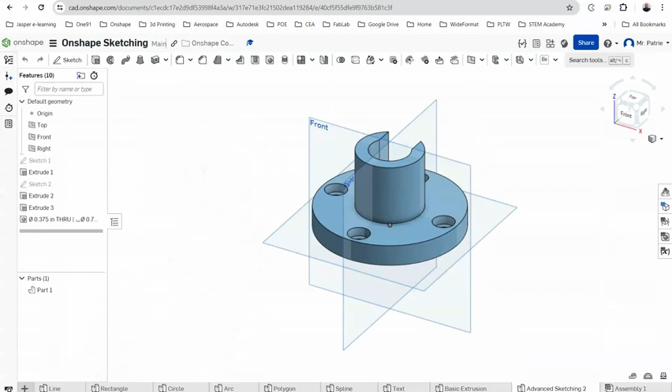We'll go to Onshape. You can open the Onshape assignment for advanced sketching. I'm going to create a new part studio and rename it advanced sketching. I'm going to do a new sketch and put it on the front plane.

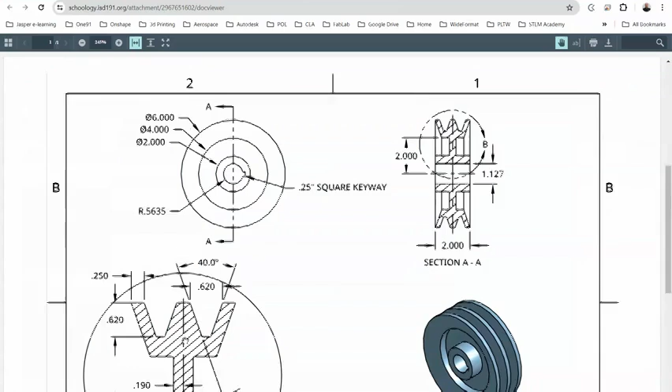Now the first thing I want to do is get this set up, because we're going to be drawing a profile and then revolving it around. So I do need the diameters in there.

The first diameter, they're telling us we're basically going to draw this line here first, and that line is where this hole is at. It's telling us right here that hole is 1.127. So the first thing we're going to do is go into Onshape.

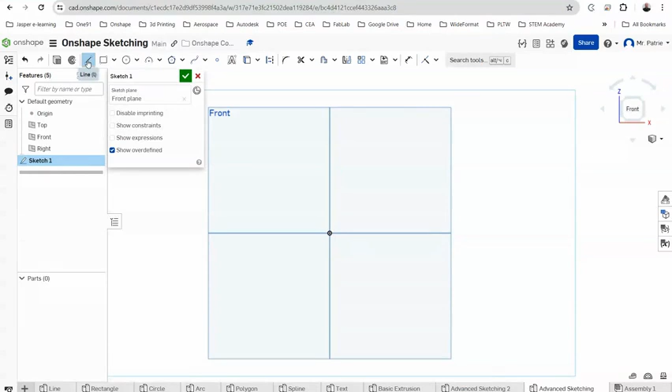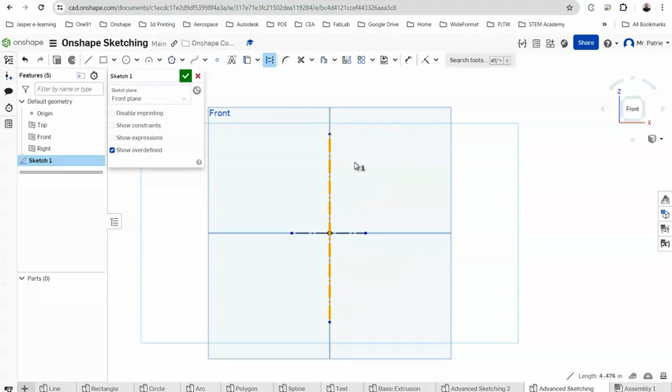I'm going to make a line, make it a construction line, and draw it in here. I'm also going to draw a construction line here as well. If it doesn't draw it, you can click on it and type Q and it will make it a construction line. I'm now going to draw a regular line.

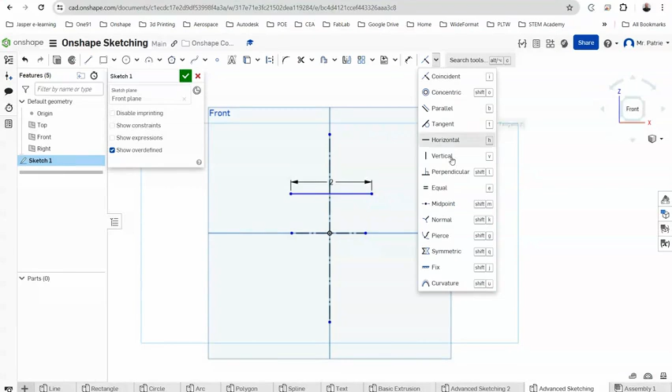This regular line is going to be 2 inches long. So I'm going to draw a line and make it 2. I do want it centered, so I'll go up to my constraints and do symmetric. I'll choose my 2 endpoints, then choose my line, and that'll make it symmetric.

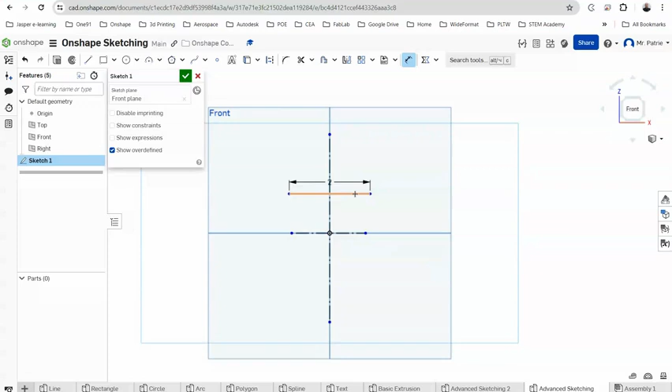Now I want this line, which is the same as this line here, to be 1.127 diameter. So I'm going to take a dimension from here to the center line, and pull this out. You can see it's giving me a diameter here. You can also do it this way, but we want it as diameter, and we're going to do 1.127. I double check to make sure - yep, 1.127. So that gives us the bottom.

Now I'm pretty much just going to focus on drawing this here, and then we'll double check to make sure that it's 6 inches in diameter to the top. It should be once we get all the correct dimensions in, but I might go do that right now just so that we have it.

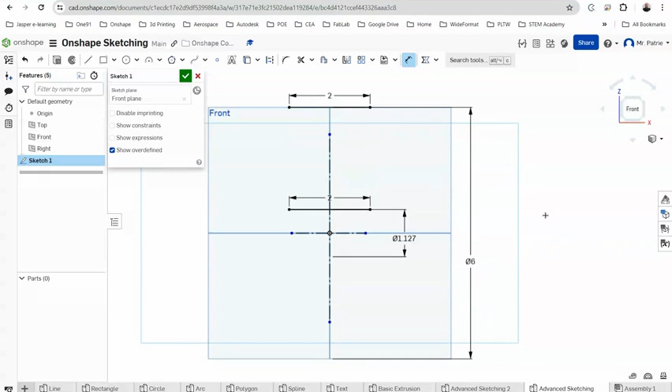We'll put another line in here, make it 2, make it symmetric. Then we will dimension from there to there, and make this one 6. I do want to make this line now longer. So that's the top, that's the top up here, that's the bottom.

So we're at 0.4365 right here. I'm going to take a line, start here, go there - 0.4365, I think is what I said.

Yep. And then this one here doesn't tell us this length, but it does tell us it's 0.190 from there. So all we're going to do is draw this in here. We're not going to put a dimension in, but then we're going to dimension from here to that, and that's going to be 0.190, I think. Yep.

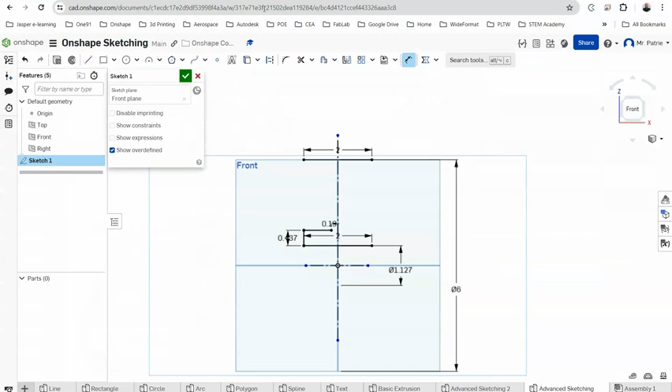This one here, it doesn't tell us this height, but we know that to there is 4. So I'm going to draw this line straight up. Not going to put a dimension in, but I'm going to dimension it from there to there, and I'm going to make that 4. So you can see we got that started - we got it right to here.

We don't know this length, so we can go ahead and start at the top and then connect it back. This is again 0.19, so we can come out 0.19 from the top, and we're going to do a line down at, let's see, I think 20 degrees.

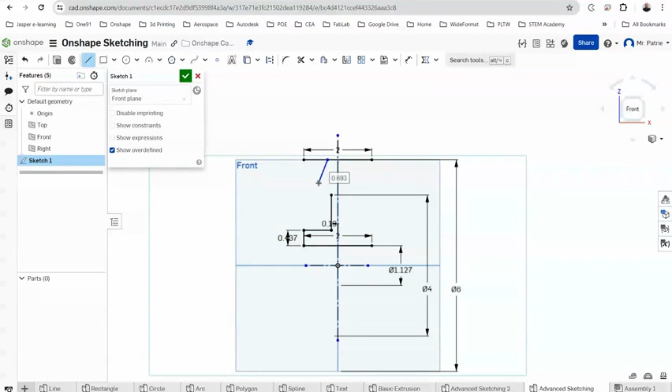So I'm just going to start here and bring a line down. I'm not going to worry about dimensioning it right now. And I'm going to dimension from there to there, and that's going to be 0.190.

It did tell us that from here to here is 0.620, I believe. And then it does tell us it's 20 degrees. This one here is 20 degrees, so this one should also be 20 degrees. So we're going to dimension from here to here, and we're going to make that 20 degrees. That gives us our first line here.

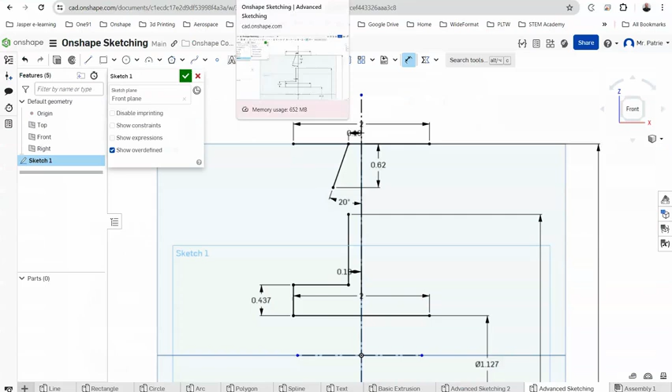It doesn't tell us this one, it tells us this is 0.620. And this is 0.25, so we could start over here on the other corner. We're going to go from here to here, and that's going to be 0.250, right? Then 0.62 down.

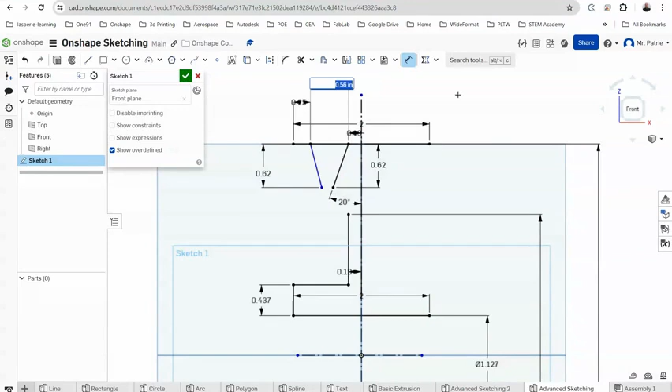And then it tells us that they're 40 degrees apart. And then from here to here is 0.620. I think, did I do that right? Yeah, 0.620.

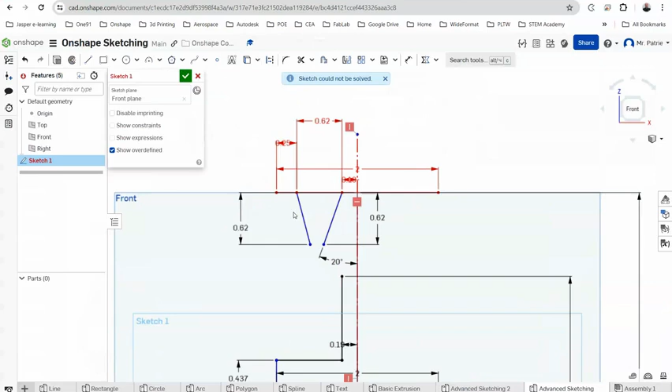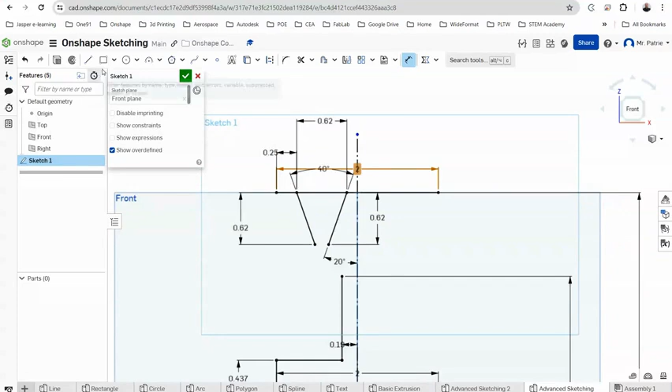Did I not do this one at 0.19? Oh, it doesn't really tell us that one's at 0.19, so that's my bad. We'll take this one out. This one is 0.250. Okay, that moves everything over, so that works out now. And then from here to here is 40 degrees. And then boom, those two connect.

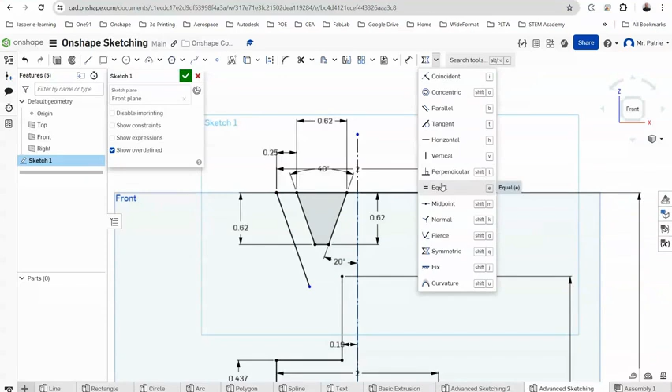This one is just parallel to that one. So we can just draw a line here, until you either get the parallel, or you can go here and go parallel and just choose those two, make them parallel. I just drew it down because these two are just going to intersect right there, and then we're going to trim this off.

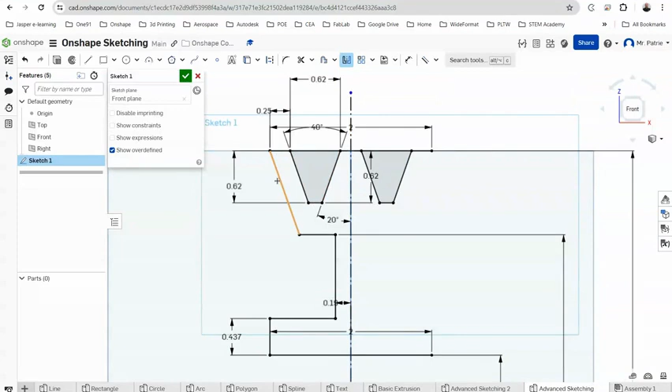Now you can see this is not gray, so it is not ready. It's not fully closed yet until we mirror it over. So we're going to hit mirror. I'm going to select this as my mirror line, and then we're going to mirror all this over. And when I do that, you can see now it's connected.

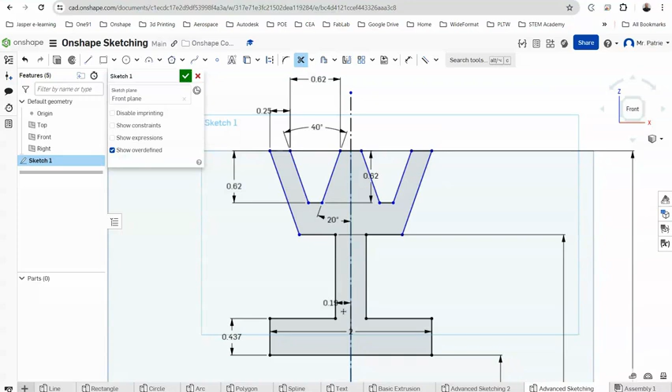You can trim that out and that out. You don't have to trim them out, you could leave them in there as well. But there it is, it's pretty much ready to go over. We'll take a look at it here. Yep, looks about right. So we will go ahead and finish the sketch.

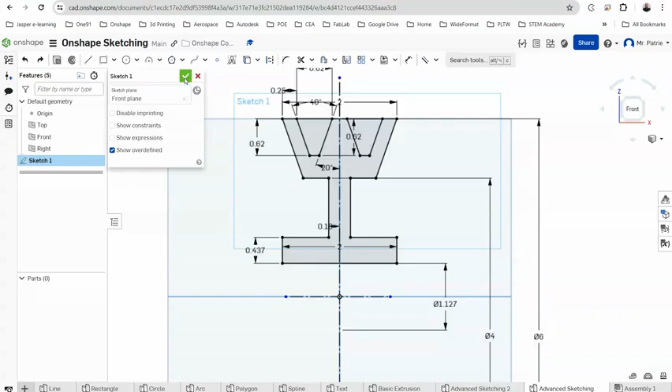I like to move it to an isometric. And then we're going to hit revolve. Faces, regions to revolve, we're going to revolve that. Revolve axis, you got to click on that and then choose this one. Boom, there it is.

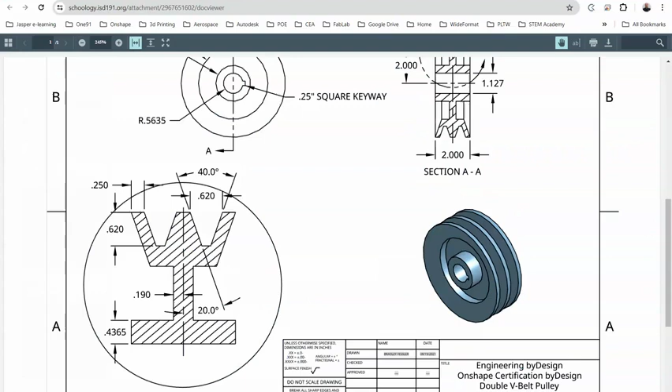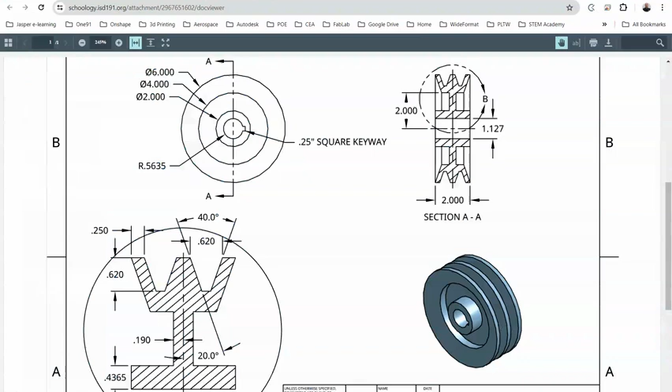The last thing we got to do, we got to put this keyway in. Now, keyways are a little weird. It says it's a 0.25 square keyway. So basically, we'll go here, we'll put a sketch on this.

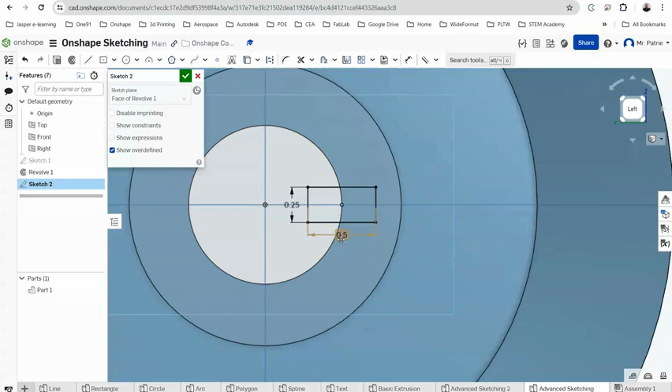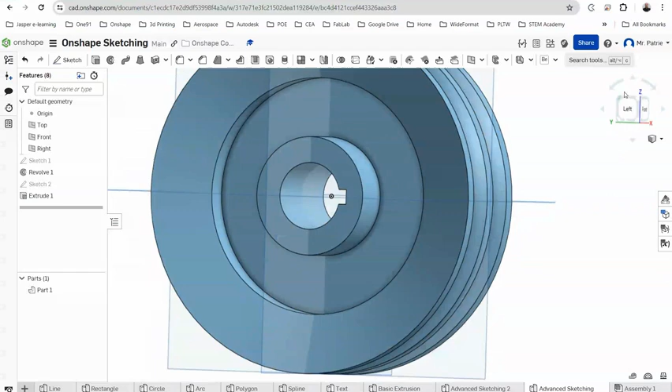Finish that. Extrude — you really just need to extrude this, remove it through all. And then you have a keyway in there. So there you go, that's how you make that one.

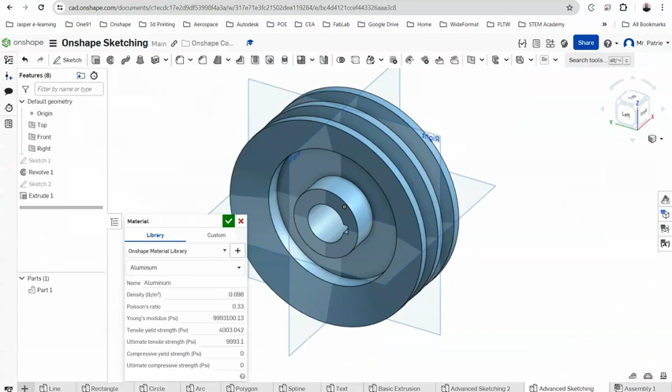So that is it, that's the only one for this. Oh, I forgot, I got to show you how to change the material. So it wants to be aluminum. We go to part one, we'll right click on it, we will edit or assign material, go to the Onshape library, type aluminum. You'll just use the default aluminum unless it tells you down here a different material like aluminum 1060 or something like that. So you'll just choose aluminum, hit OK. It doesn't change the look or anything, but it does allow us, so if we display the mass properties of that part...

It'll tell me that that will weigh about 2.481 pounds. So that's what you should probably be getting for an answer for your mass properties. So you can double check your work. If you get 2.481, then it's good. If you didn't, then you must have done something incorrect, or you chose the wrong material or something like that.

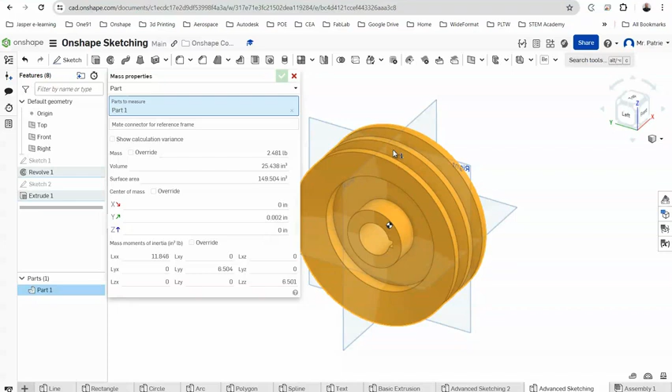Hopefully this video helped. If you have any questions, make sure you ask your instructor.